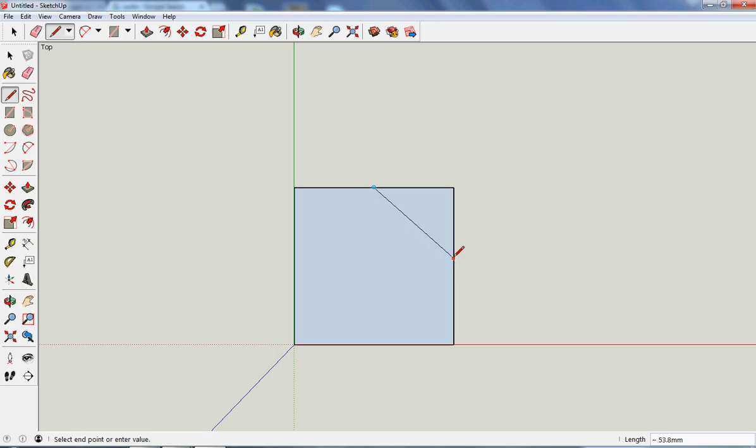And I want to make a triangular shape, so I'm going to draw some lines. If I go along here, eventually it'll stop and tell me I'm at the midpoint. Great. And I want to go to the midpoint of this line. So again, if I move around, eventually it's going to say you're at the edge, you're at the midpoint, which should be somewhere around there.

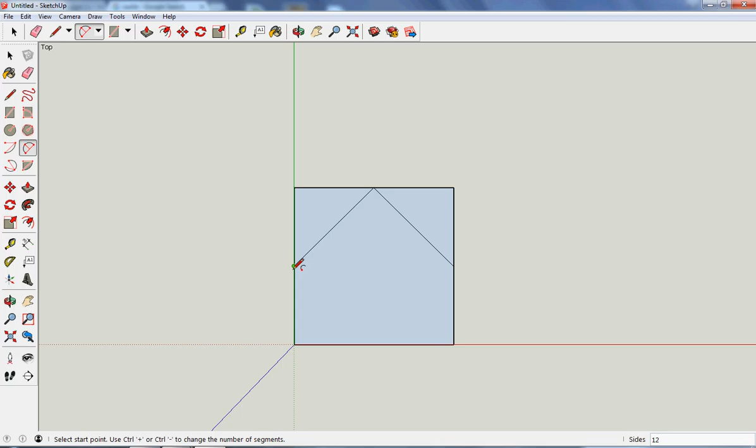And the front here I'm going to make into a big curve, and I'm going to do that with this arc tool. So I draw a line from there to there and then pull it forward again to the midpoint, so it makes a nice half circle. And that's the basic shape I want my base to be.

Now obviously the square I used to help me get things the right size, I can now remove. Now obviously what I want to do...

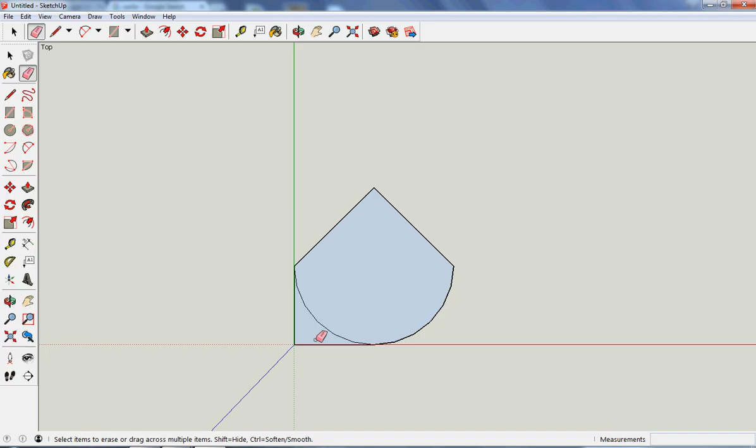is I want now this to come up but have nice sloping sides. So I could now try and draw exactly the same shape inside here and then use move to pull it up. Well, I don't need to draw the same shape.

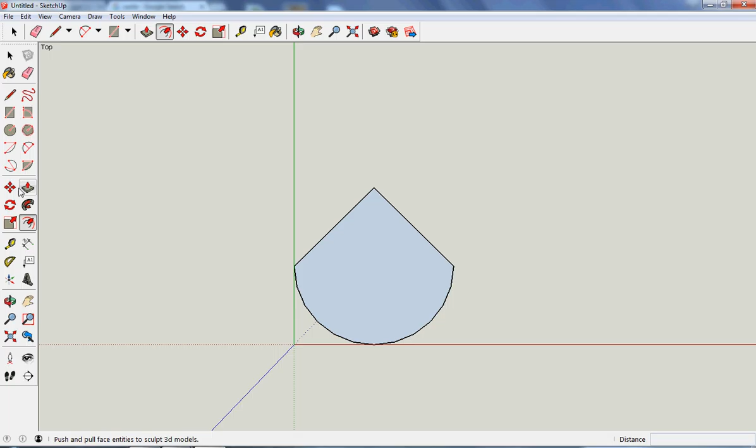I can use this tool here, which should come up and tell me what it is. Okay, it's actually the offset tool. It doesn't seem to want to tell us it's an offset tool. If I click on that edge and pull inwards, it now draws a line inside the other one. So I undo that: click on the offset tool, click on the line and move inwards, and obviously I can tell it how far in I want it to go.

So I'm going to ask it to go in by 10 millimeters, and there it is. Now if I take the camera and go to an isometric view, the same as we've seen before...

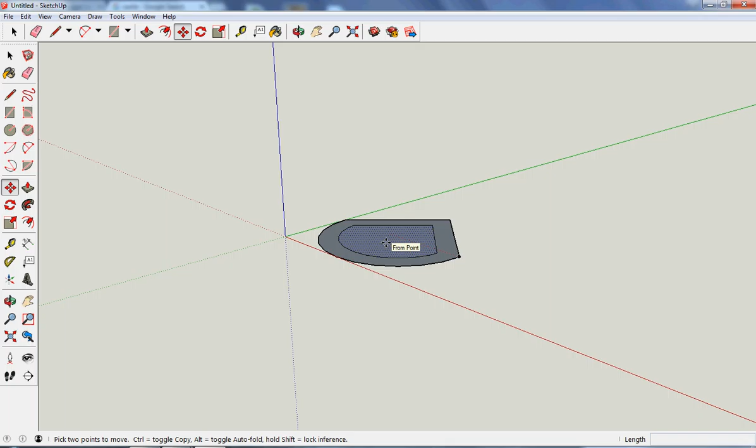if I select that top shape, I click on move and hold down the Alt button and drag it up, then it will move up in the right direction, and I can say I want that to be, I don't know, about 10 millimeters thick or whatever it is I want it to be. It can also be quite fun, this, because you actually don't quite have enough hands to do it with.

And that again, if I look around at that, if I rotate it, that's done the shape I wanted quite nicely. Okay, so I've now got a nice curvy shape.

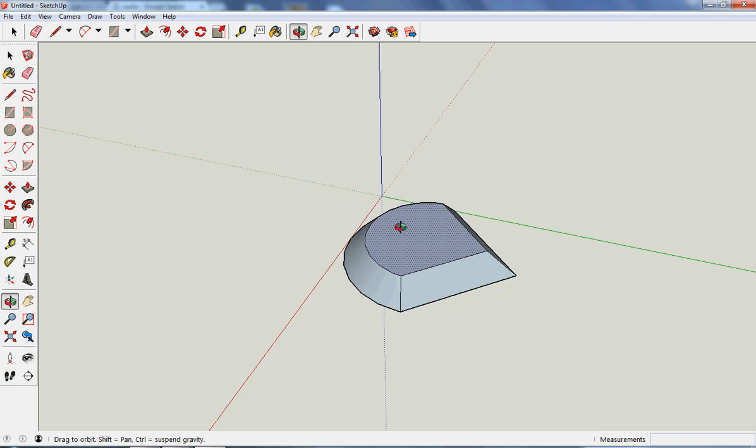If it hadn't quite done the shape that I wanted, again I could have used extra lines, drawn extra lines with the pencil to control exactly how it draws the shape. But I quite like that shape as it is. Again, it's a nice simple shape with not too many points, so it'll tend to do okay. It's only when you get really complicated shapes it sometimes won't guess very well.